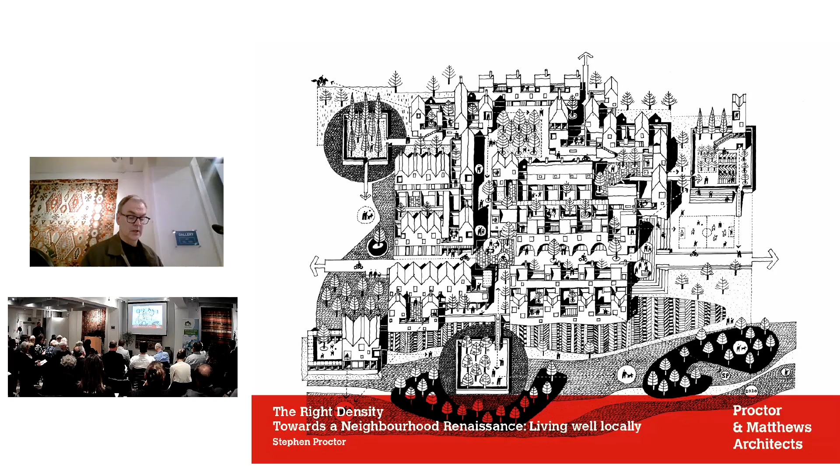We've published various papers on this and collaborated with others on publications such as Distinctively Local, which examine the theme of living well locally with a sensitivity towards context and identity. All these documents are available here or on our website.

But of course, there is no definitive answer to what is the right density, as it's all dependent on location, a response to context, the anticipated demographic mix, the immediacy of existing public transport, or the potential for new, achievable, sustainable transport networks, the proximity of existing community infrastructure, etc.

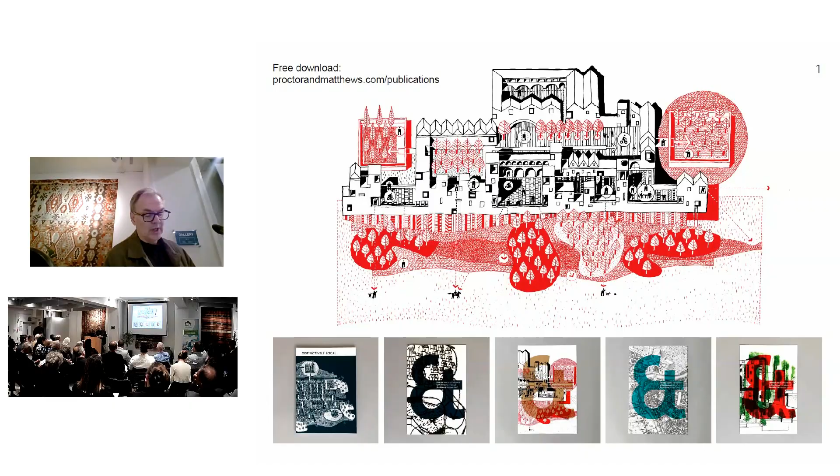And then there is the question, are we talking about the right urban density, as here at the master plan for the Carpenters Estate in Newham, a mixed-use residential neighbourhood of apartments, family homes, both houses and maisonettes, to an average density of just over 200 dwellings per hectare, with specific character areas delivering from about 85 dwellings per hectare around the central neighbourhood green to around 400 dwellings per hectare by Stratford Station in the north.

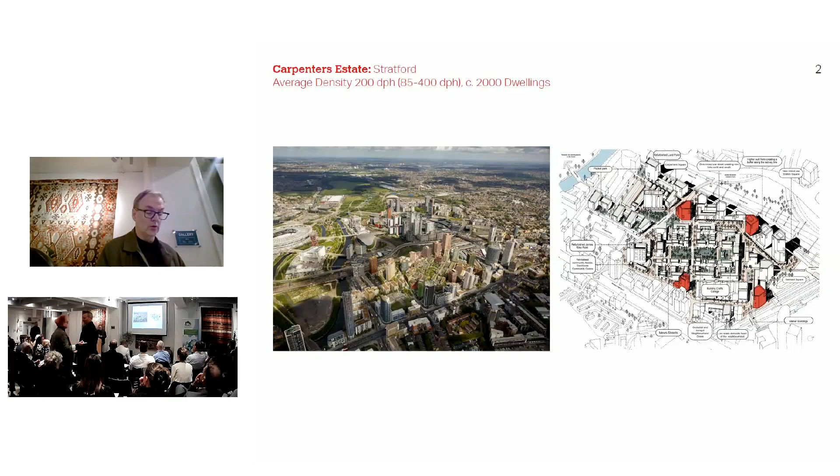Or is it the centre of Mansfield? This is our competition-winning entry for ideas to bring homes back to the centre of the Midlands market town, reusing existing historic structures and an overlay of new buildings to provide a mix of apartments for general needs and later living, and own door housing for young families, providing a gentle but appropriate density of around 87 dwellings per hectare, with 20% of those as family houses, and a new sequence of public spaces and communal productive gardens.

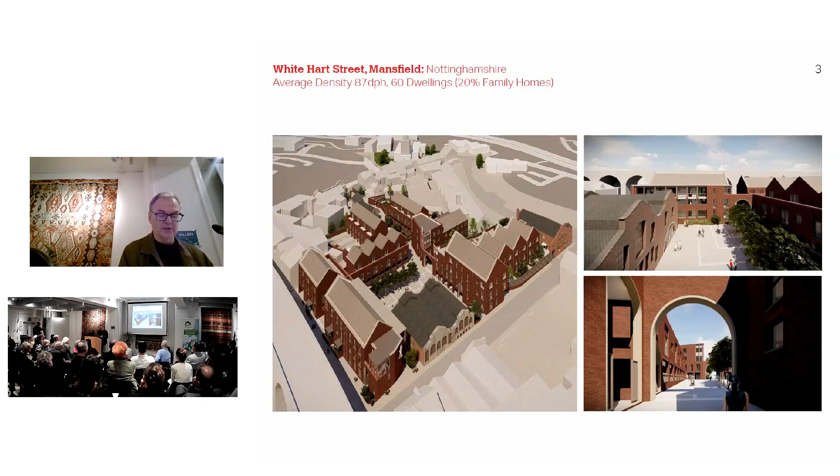Or is it a more rural density of around 35 dwellings per hectare, like this study for a new neighbourhood within the grounds of an existing country estate at Impney Hall, within walking or cycling distance of the Worcestershire town centre of Droitwich?

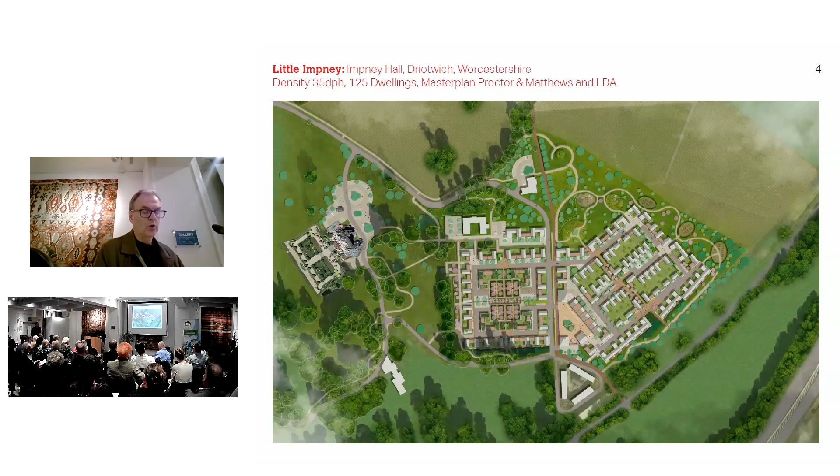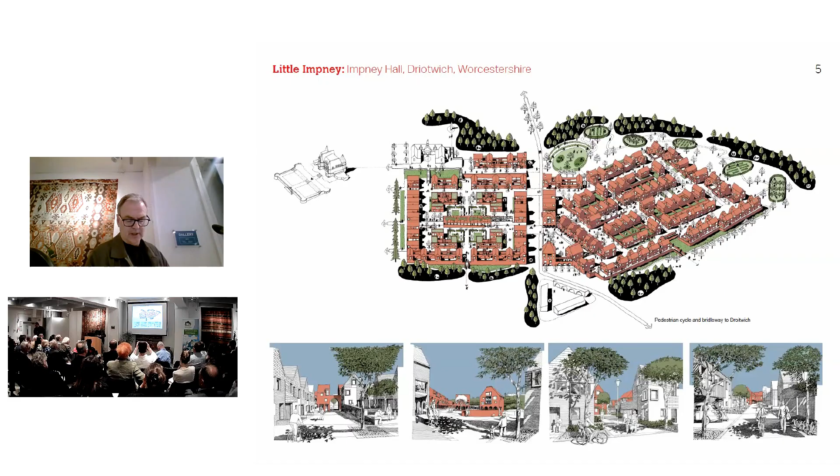Or is it somewhere in between? This is the scheme actually - Great Kneighton, part of the southern fringe expansion to Cambridge, with an average density of around 47 dwellings per hectare.

More of this a little bit later. As we've heard from Hassam, Matthew and Esther and others, we should look for solutions that reduce car dependency and make neighbourhoods more walkable and cyclable, and more integrated with existing and new community infrastructure.

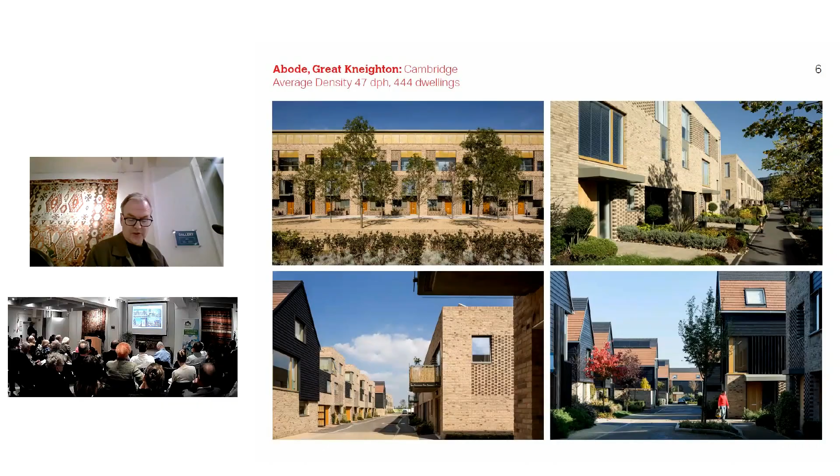It's certainly the case that we need to use land more sustainably. We need to protect land and landscape to increase biodiversity, provide solutions for sustainable drainage, and to promote general good health and improve well-being. Therefore, intensification of new and retrofit neighbourhoods is undoubtedly the way forward.

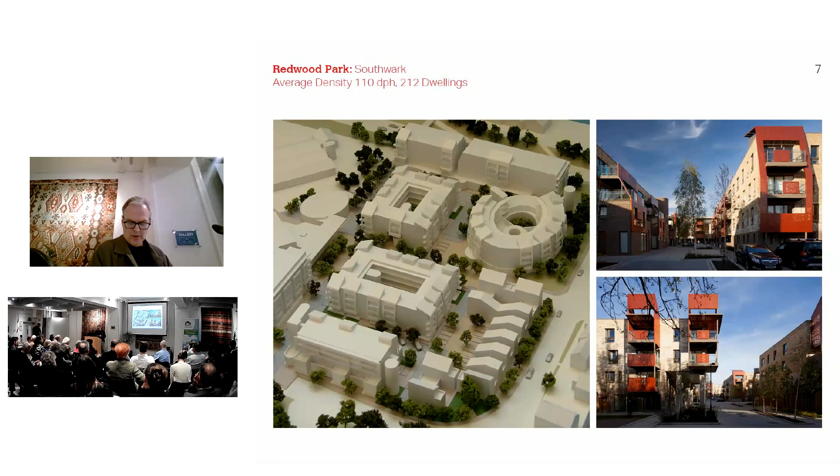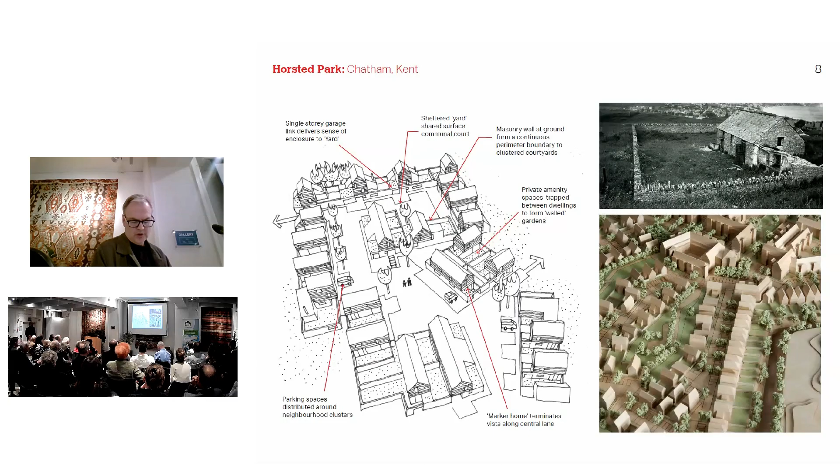But in the search for identity and a sense of place, it's important that we balance these new higher densities with an understanding of context. Perhaps we should look to more historic or vernacular forms and the choreography of place, and to ways in which we can absorb higher gentle densities in a sensitive and seamless way.

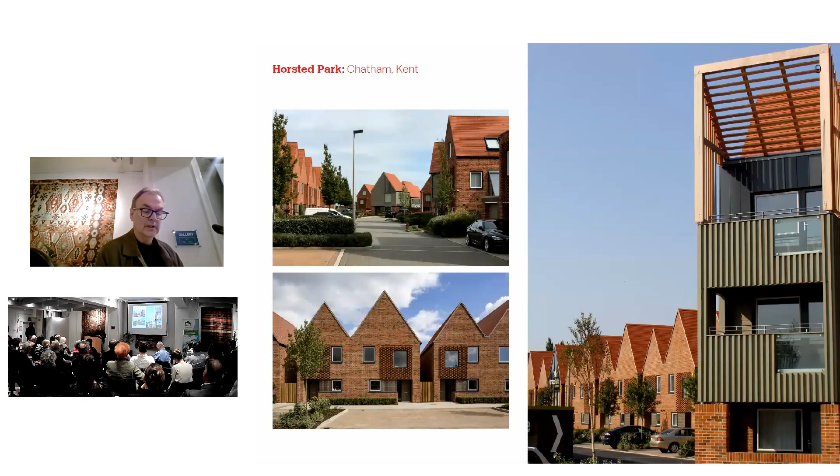This and the previous slide are of Horsted Park in Kent, which looked to the vernacular forms of local farmsteads as a conceptual narrative, and the design of Abode at Great Kneighton, which started with a study of the monastic and collegiate court structure of historic central Cambridge, combined with references to the fine-grained burgage plot morphology of Fenland villages.

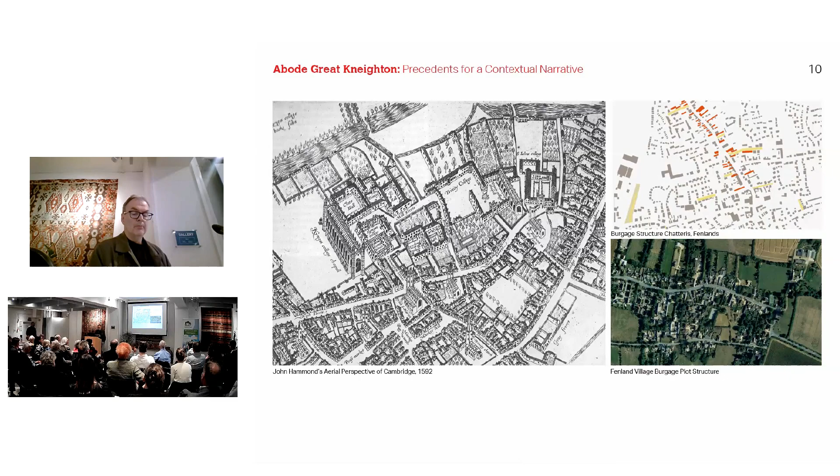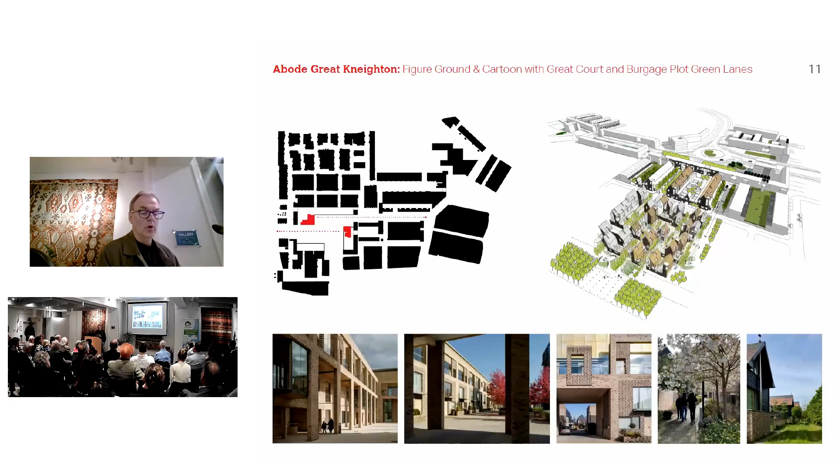And increased density clearly helps to provide the framework for an improved social infrastructure: schools, health centres, workplace, gyms, shops and cafes, even community allotments and orchards.

But as we all know, higher densities come with other challenges. As numbers of residents increase, we must create more public and communal space for social interaction, and for our health and well-being, more space for quiet retreat and contemplation.

Perhaps one area where this is particularly challenging is city and town extensions, an area of study for much of our work, where pressures on the urban historic core require a rethink of the city or town fringe.

As we all know, this is often the area traditionally targeted by the volume house building industry, with conventional cul-de-sac developments of relatively low density, say somewhere around 15 to 25 dwellings per hectare.

This is often where we're told the demand for car use is perhaps at its greatest - driving to work, driving to shop, driving to school, or even driving to relax.

So in these areas, we are now looking at gentle densities of somewhere between 35 to 75 dwellings per hectare, again dependent on context and dwelling mix.

We know that once you break the ceiling target of 40 to 50 dwellings per hectare in edge of town locations, where the demand is for a greater proportion of own door housing, you can no longer rely on the typical typologies of terrace or semi-detached housing with back-to-back gardens, without creating a repetitive monotony of endless streets, of relentless perimeter blocks - normally 40 meters wide, we've all seen them - and grids, what Gordon Cullen referred to as endless, featureless suburbia where homes are homeless.

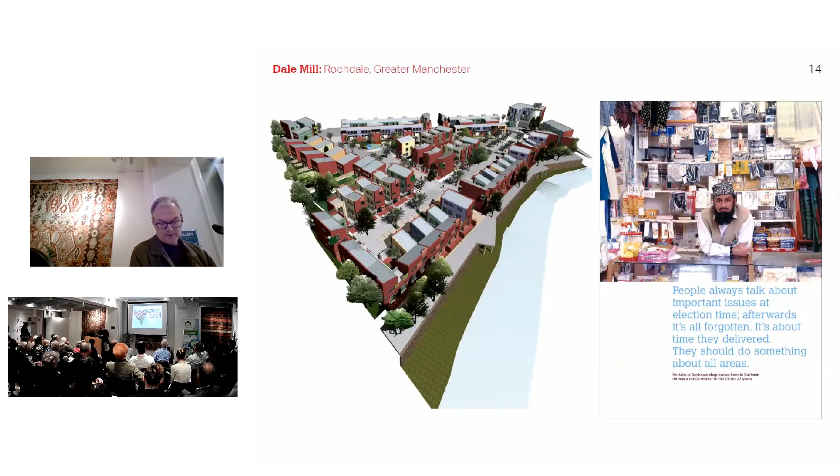But with the pressures to achieve biodiversity gains and a healthier lifestyle, our relationship to landscape is becoming more and more important, with greater efficiencies required in the use of precious land and resources. Perhaps the quote now resonates more.

Certainly, we have to think about the built form to landscape interface. It's no longer appropriate to think about neighbourhoods bounded by a defining edge of B&Q back garden fences. Similarly, is it the best use of land to arrange perimeter roads which only serve dwellings on one side and create tarmac roads as a neighbourhood threshold to adjacent landscapes?

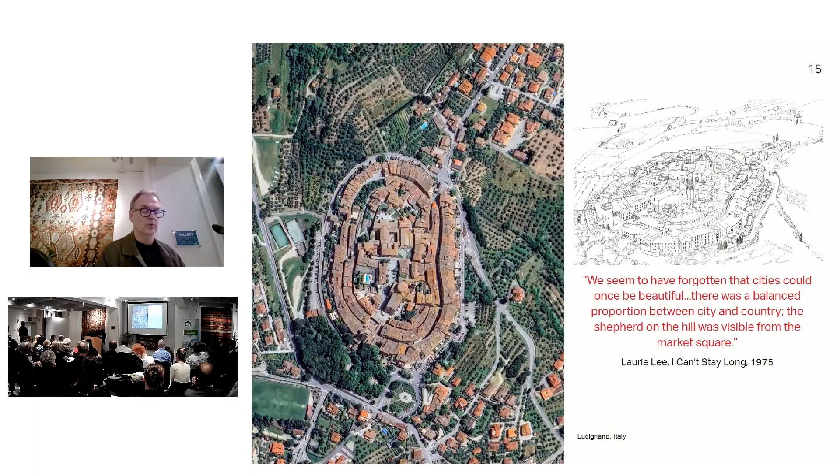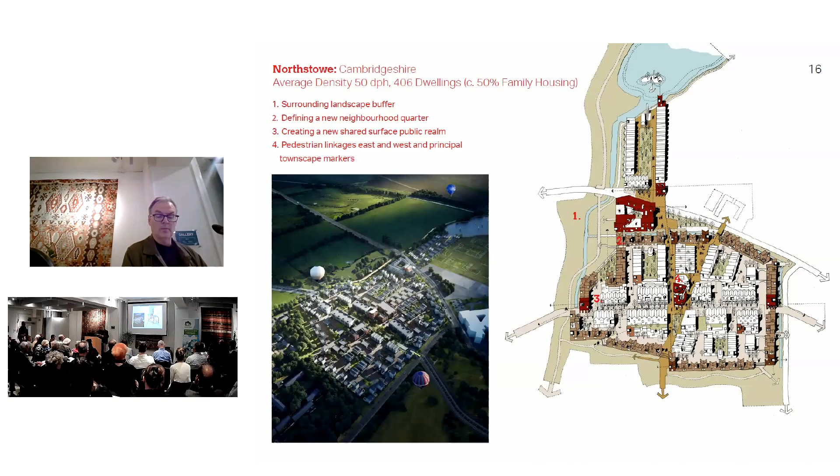These are examples from recent projects where we've explored a different kind of edge condition. At Northstowe here, this is a particular study of a particular kind of edge house for people that are introverts and people that are extroverts, perhaps.

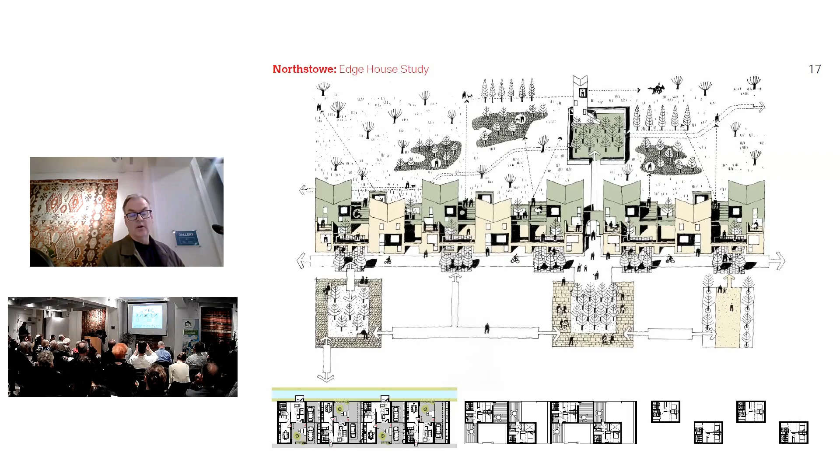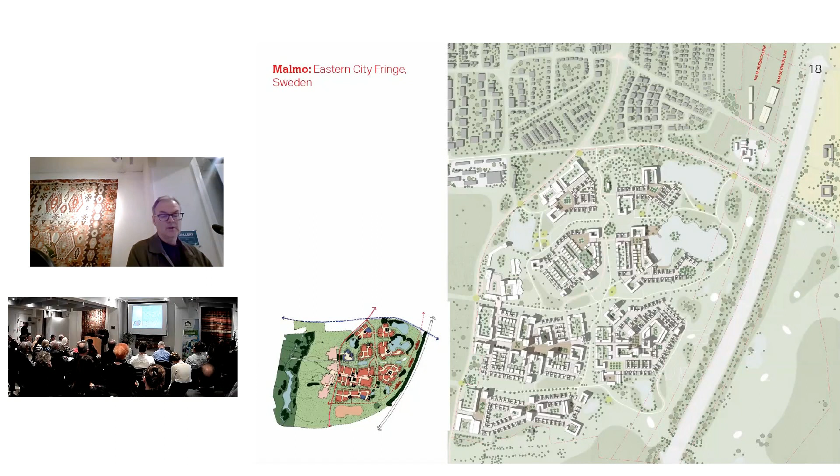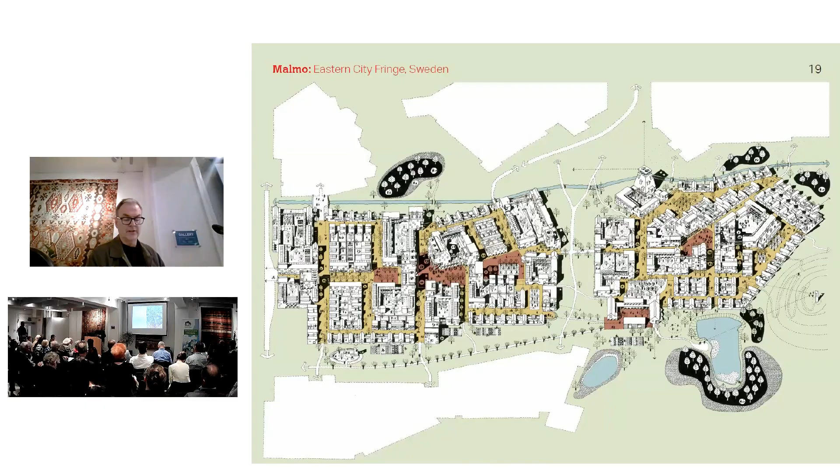That's one of those villages. We often talk about removing boundaries in a search for greater freedom of movement and to enhance inter-neighbourhood interconnectivity. But as Hisham Matar in A Month in Siena says, boundaries help to craft and nurture a sense of identity and a sense of belonging.

And so threshold spaces and settlement boundaries must work harder. Similarly, a celebration of the threshold between neighbourhood quarters also becomes more and more important. We often talk about character areas, but are these really merely a change in roof tile and brick colour?

At the Carpenter's Estate, next to the Olympic Park, our renewal master plan, produced in collaboration with Tibbalds Planning and Metropolitan Workshop, responds to residents' requests to make a real piece of London, as opposed to the anonymous scale and expression of some of the recent surrounding developments.

Here, both the edge condition, the neighbourhood boundary, and the gentle density of the neighbourhood heart, a community focus, is clearly expressed within the three-dimensional spatial framework.

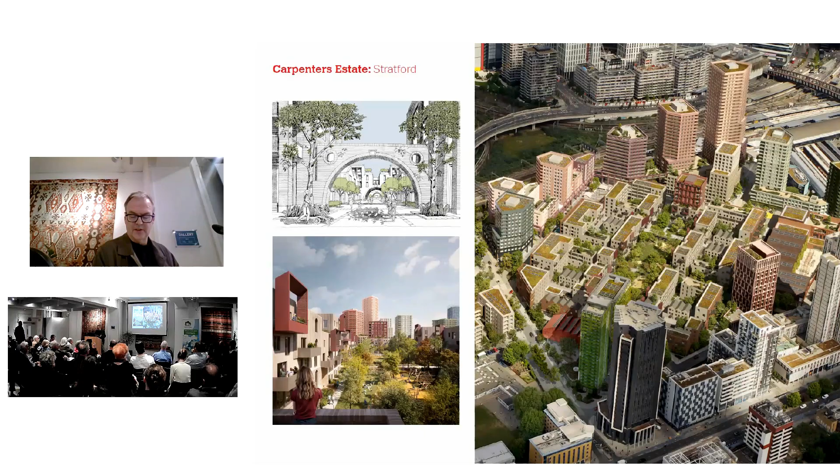And so we get to the finer grain of the neighbourhood spatial hierarchy: streets, squares, lanes, and mews. Some more of a communal nature than public, some areas for neighbourly interaction, and some more frequented by visitors and those merely passing through. This is our work at Riverside, Sunderland, designed in conjunction with FaulknerBrowns and Mawson Kerr Architects, a proposal for 4 new neighbourhoods which straddle the River Wear.

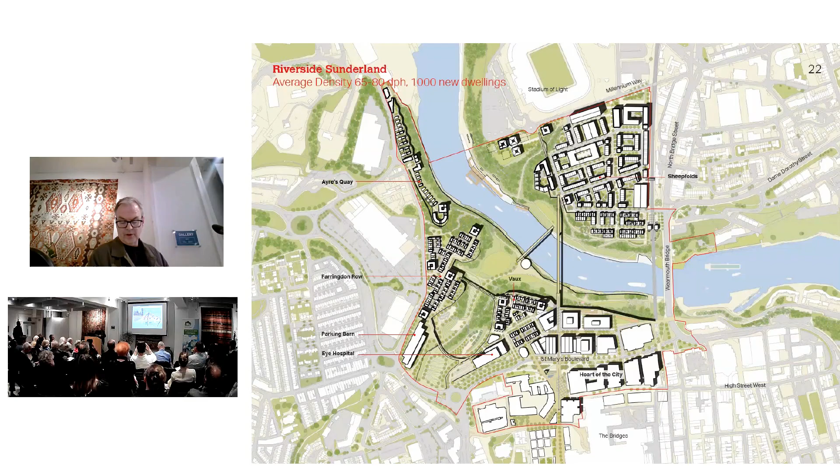At Vaux, one of the first phases of the Riverside master plan to be developed, there is a clear definition between the sheltered mew spaces, which provide a protected environment for neighbourly engagement and children's doorstop play, and the more public nature of the Cliff Top Promenade, which defines the neighbourhood edge and interface with the Wear Gorge landscape itself.

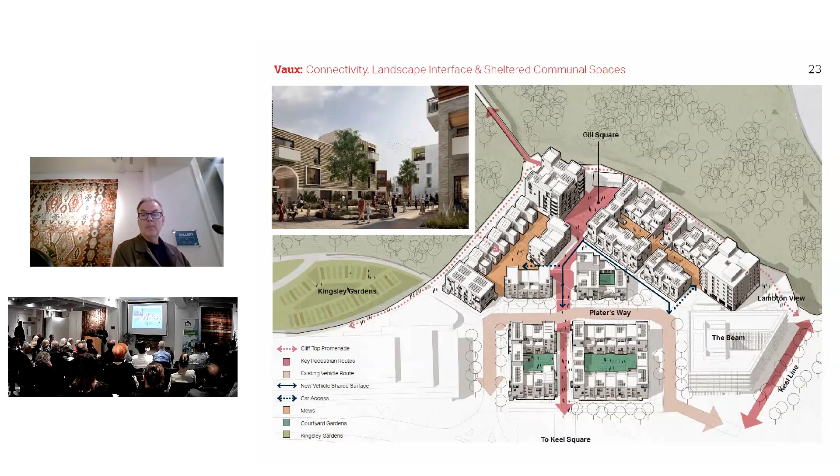So that's the sheltered mews there.

In all cases, the scale of streets and spaces and the sense of enclosure and protection this affords is important. Three-dimensional master planning, as opposed to two-dimensional zoning, is crucial in creating an environment for neighbourly interaction.

Domestic streets with visually dominant and intrusive car parking do not help to create livable streets we all aspire to. All too often, they are non-places and merely become arteries for getting from A to B.

This is one of a series of comparative studies carried out for the volume house builder Glenveagh in Ireland. What we're trying to do is offer a different way of clustering homes. This is the traditional way, delivering about 30-odd dwellings per hectare. And so we look to the vernacular precedent.

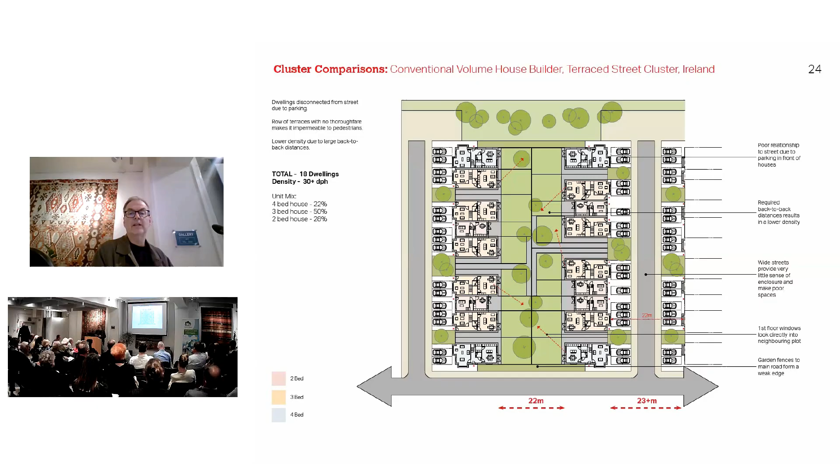This is called a clachan in Ireland, a cluster of homes around a central space. It shows the potential of this grouping as a way of not only nurturing a community, but also increasing density, and provides a better spatial framework for community interaction.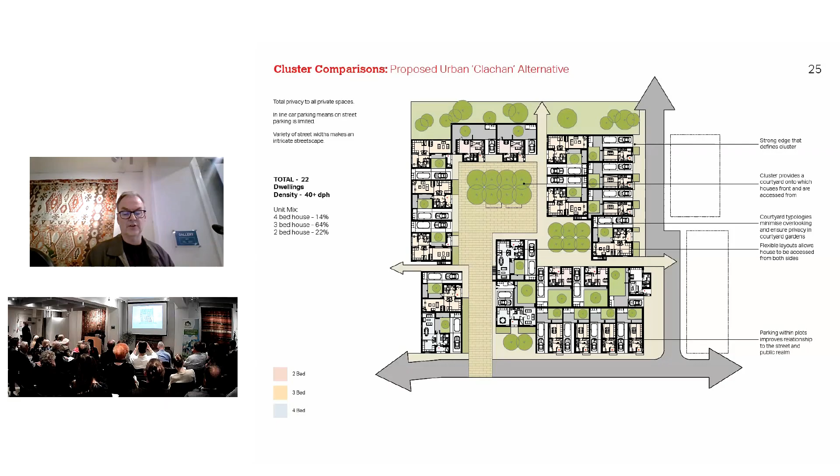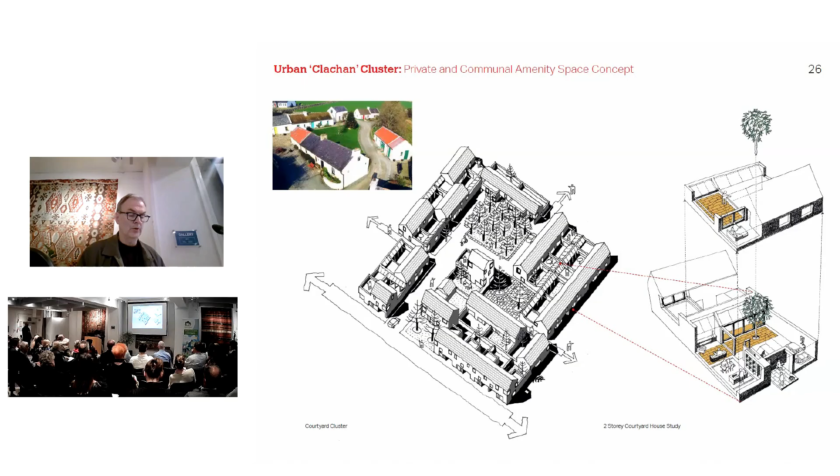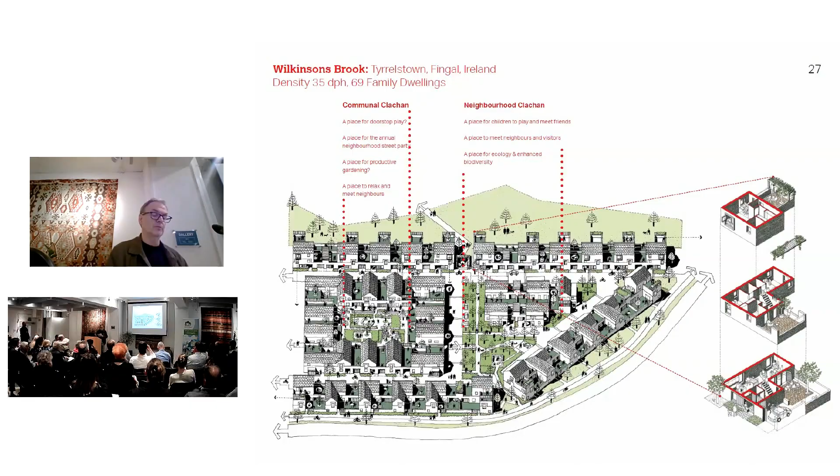This house type study for Glenveagh was later developed for a live site at Tyrrelstown in Fingal, with both communal and neighbourhood clachans becoming a focus for the new community, where the distance between residential street facades is reduced from 23 metres down to just 9 metres.

We'll see more of this later. The design of thresholds between the public realm of the street or lane and the private realm of the house, at higher, more compact densities, can be challenging too, particularly in creating a safe yet private home environment where overlooking does not become a problem.

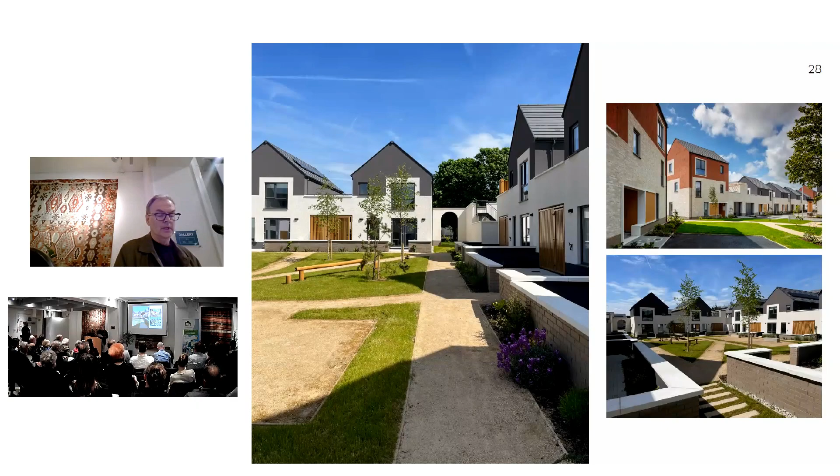These are entrance studies for the Tyrrelstown neighbourhood at Wilkinsons Brook. So, do you design streets with 3 metre wide landscape buffer zones between pavement or shared surface street and the front door, generating about 15 metres between dwelling facades?

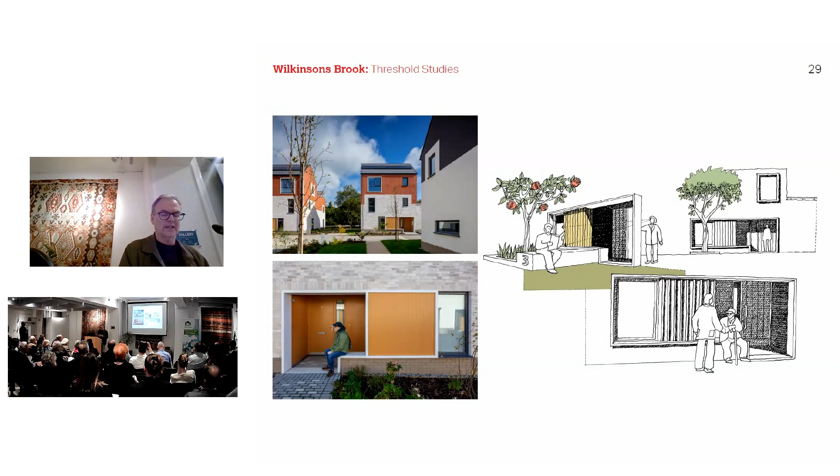Or does this still create a streetscape which is lacking in the intimacy of scale, which we all admire in historic settlements? This is a residential lane in Bruton in Somerset, about 4 metres wide.

Or do we interrogate the dwelling plan to ensure that the spaces at ground level are not compromised by overlooking, with perhaps home working spaces, kitchens or family rooms located with street frontages, mitigating the need for permanently closed blinds or curtains? Our competition entry master plan for the Ridgeway Village parcels within the New Eddington master plan in Northwest Cambridge

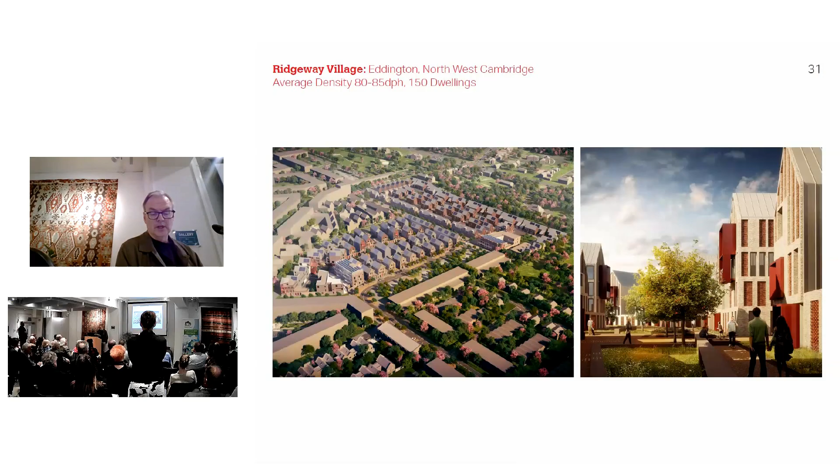But of course, one sure way of creating an intimacy of streetscape and a truly sheltered domestic street is, if possible, to remove cars and produce a remote parking solution with parking barns on the neighbourhood edge.

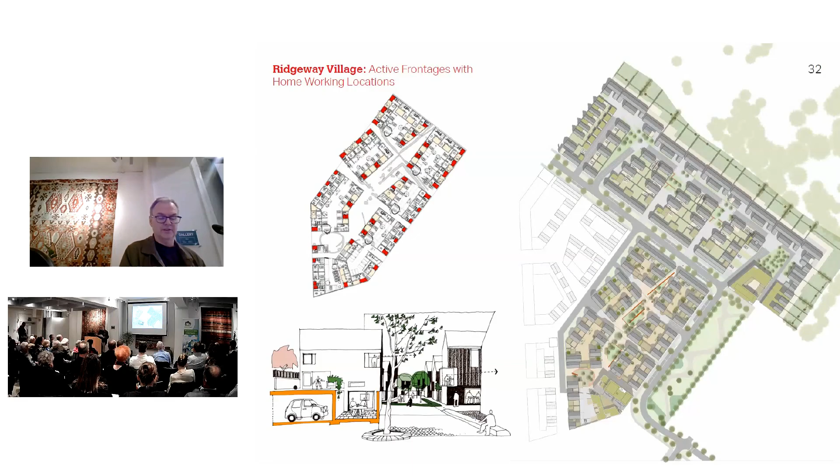We first explored this idea with Ralph Erskine at the Greenwich Millennium Village over 20 years ago, but have recently reintroduced the idea for work at Trent Basin in Nottingham, a mixed neighbourhood with a predominance of family homes and maisonettes with a gentle density of about 53 dwellings per hectare, and at Riverside, Sunderland, where

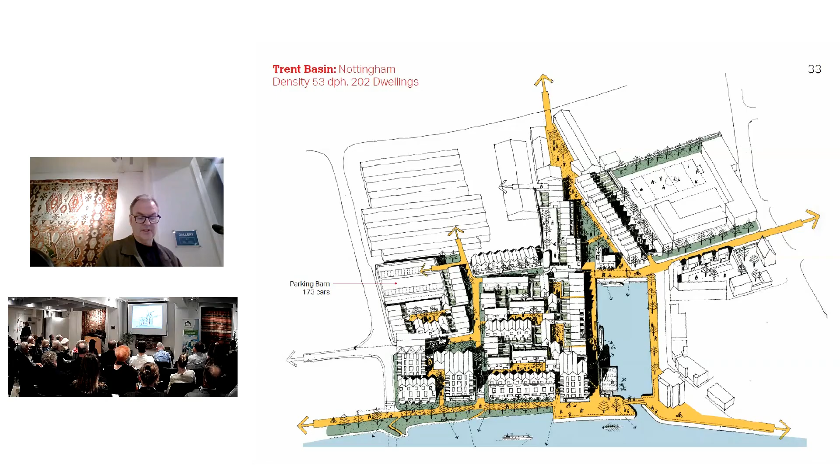strategically located multi-level parking structures provide parking for residents, business space and new medical facilities. In addition, they provide energy centres, battery stores, and the mobility and home delivery hubs that we've heard about earlier.

And finally, to the house types themselves, increased density neighbourhoods often require a different approach to clustering homes, whether this is stacking of own door maisonettes, as at the Vaux neighbourhood in Sunderland, with dwelling types based on locally distinctive

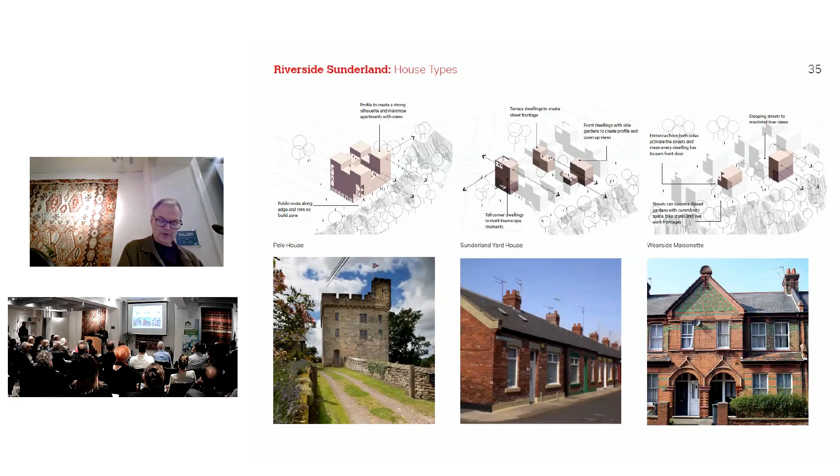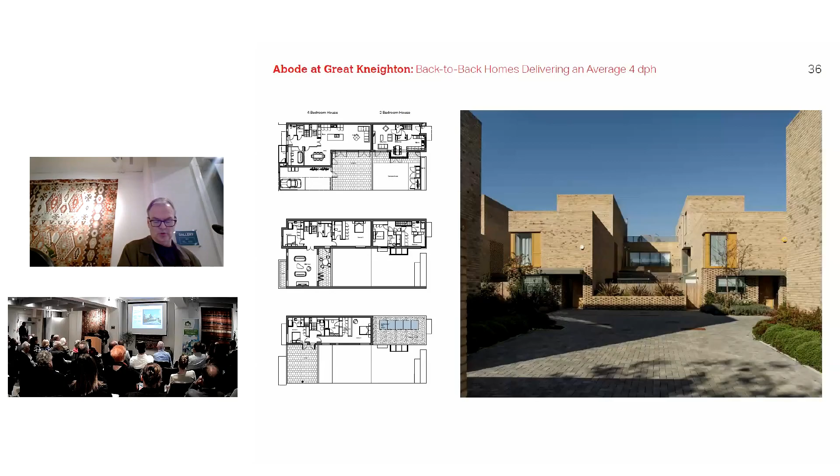precedents, or even the contemporary take on the traditional back-to-back connected homes as at Abode at Great Kneighton, where two-bedroom mews houses share cross walls with larger 4-bedroom and 5-bedroom houses.

We must challenge the conventions of the 18 to 25 metre back-to-back distance and anticipate the design of homes accordingly.

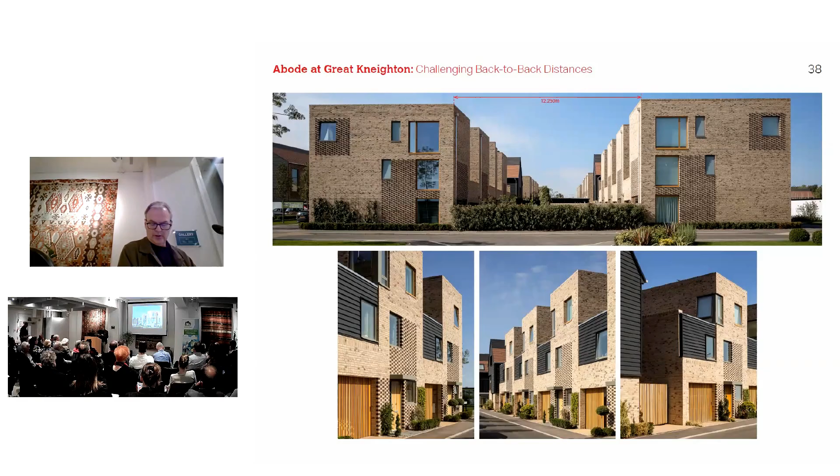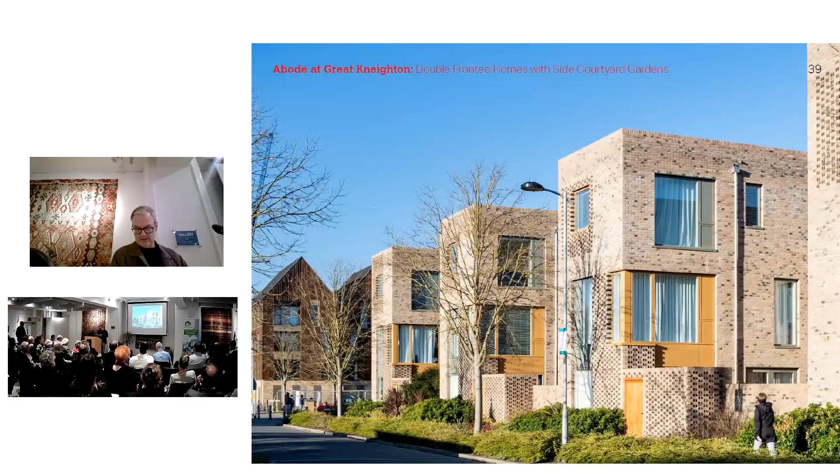But sometimes a more compact form is required for the dwelling to meet increased density targets. In this case, the courtyard house and townhouses, some with no ground level amenity spaces, as at Great Kneighton—sorry, let me go back to that—and similar types at Wilkinson's Brook. That's the ones at Great Kneighton, and then Wilkinson's Brook at Tyrrellstown, which can help deliver more privacy.

These courtyard dwellings deliver a greater range of private and external amenity space for the post-COVID world, an external court garden for children to play, or upper level terraces for summertime home working and relaxing, and the ability to track the sun and daylight at all times of the day.

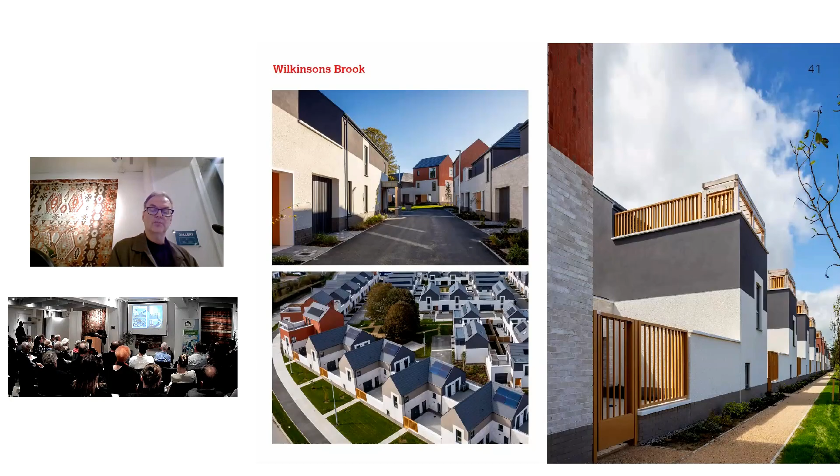Some of these examples have the added advantage of having dual entrances, which can help to unlock the design conundrum of what to do at the neighbourhood edge, where access to surrounding landscape or streetscape is desirable, but only car access can be provided on an internal street frontage.

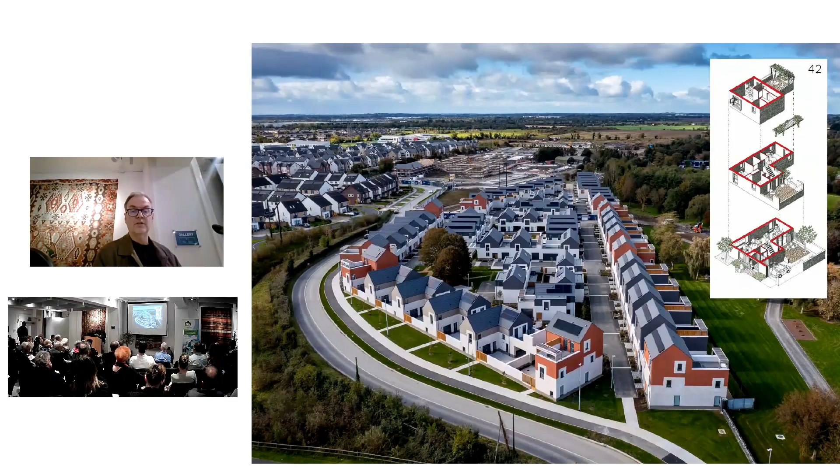The courtyard format also provides an opportunity to integrate cars off street in a less intrusive way. In curtilage parking, with an inline arrangement, one car behind another, offers a carrot and stick approach. Either you sacrifice or compromise a little of your ground level amenity space for a second car, or the arrangement discourages residents from making unnecessary short car journeys.

So to conclude, we should not look to increase neighbourhood dwelling density and the associated intensity of use without an increase in the quality of private amenity space and an increase in the quantity and quality of community space.

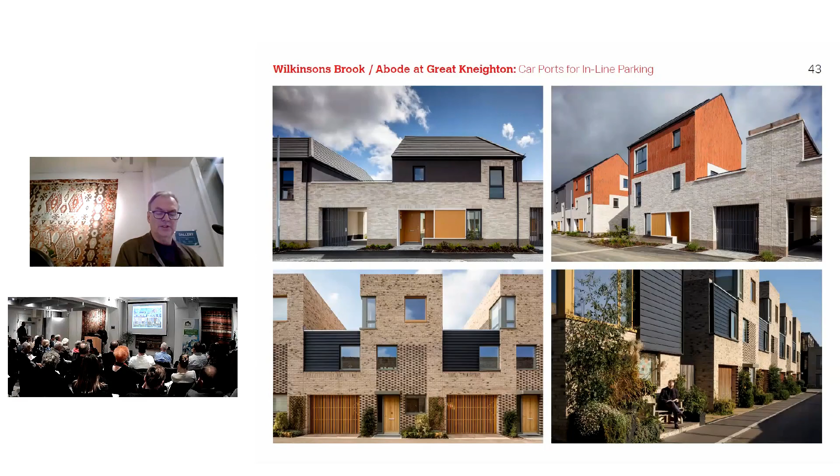So to achieve gentle density neighbourhoods of between 40 and 80 dwellings per hectare with a greater percentage of own door family housing, for us, master planning is a collaborative endeavour which engages in an iterative way at all scales, from the strategic plan to the detail of the home, becoming a three-dimensional exploration of space and form. Thank you.